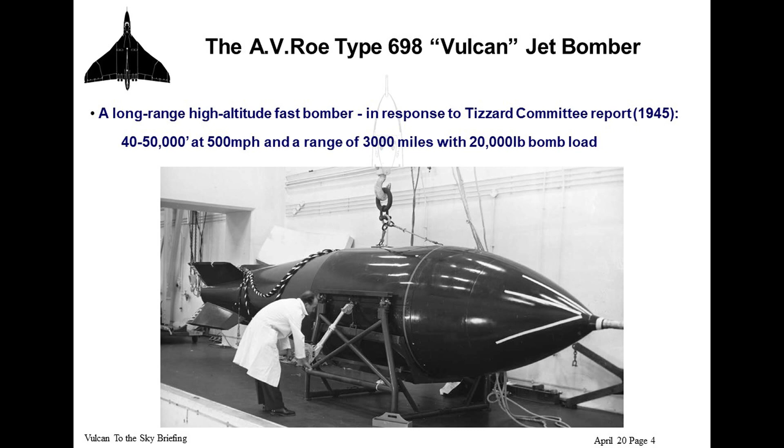Our focus is on the last potentially airworthy V-Force aircraft. This is Avro Vulcan XH558. Of all of the 300 plus Victors, Valiants and Vulcans that were made, this aircraft is the only one that is capable of being returned to flight. And I've given you there a potted history of this aircraft. It was indeed, as Tony has mentioned, the first Vulcan B2 to enter RAF service in 1960. And now at the tender age of 47 years old is being readied to return to flight.

This aircraft actually has an intrinsic value because not only was it the last aircraft to leave RAF service, but it's also the oldest complete Vulcan airframe in existence. So with that record, we're delighted to be working on this. I'm not going to bore you with very many of these charts, actually. I just need to tell you about what we've been doing. This whole exercise has lasted some 11 years now.

In 1996, a few dedicated individuals got together with the idea of discovering whether theoretically we could return a Vulcan to flight. Because we had the common view that this aircraft, of all the aircraft that have been developed in the UK, this one actually represents all that's good in engineering and in flying. It's a remarkable piece of engineering. It took us some time to convince BAE Systems that there was a mechanism, that there was a way that we could return the aircraft to flight.

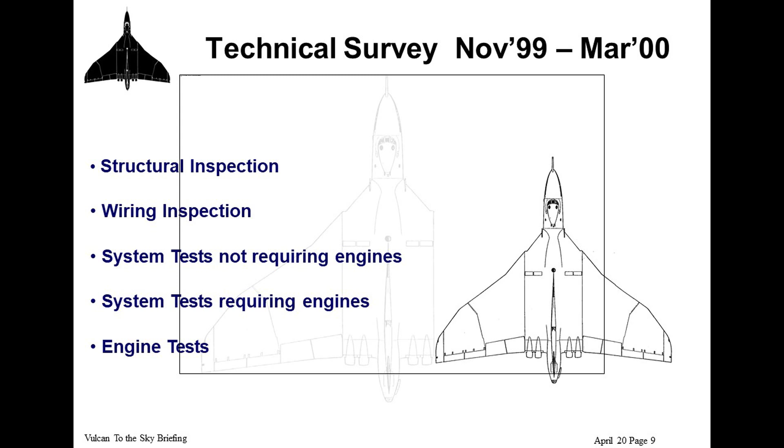I'm not going to go through any of the results of these, apart from a couple of things. I mentioned the materials - this is actually one of the front spar bottom booms. It's a mass spar boom aircraft. The engineer within BAE who supports us tells me it's actually the same as the Lancaster wing, but I don't believe him. But this thing here, this little hump, is an oxidation process called exfoliation, and it's a result of the type of material used in the wing. We did find some areas like that in the wing of this, at that stage, near on 40-year-old aircraft. One of the questions we asked was, is this a problem?

For us, the answer came from BAE to say no. They'd actually taken a look at the wing with modern tools and discovered the wing was far stronger than the original designers had thought, mainly because they were using slide rules rather than modern tools. And we could actually polish this out and protect the surface with no concerns at all.

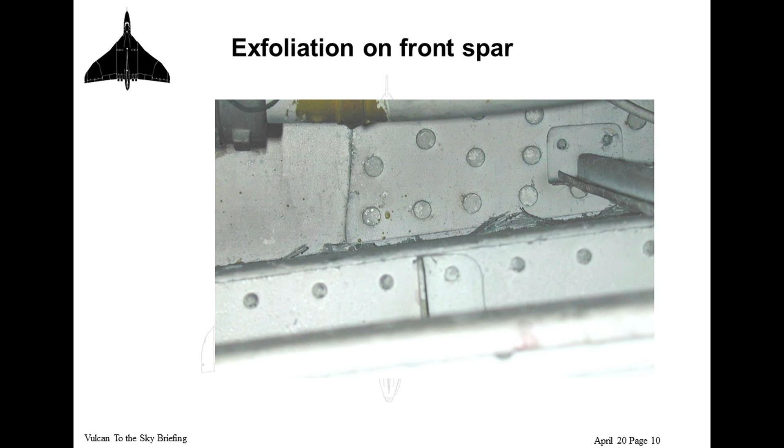Another critical success factor was the engines. Those of you involved with flying heritage aircraft know that you can repair, restore airframes really till kingdom come. The problem with heritage aircraft is the engines. I think it's the Sea Fury that uses the Centaurus engine - there's only one airworthy Centaurus engine in the world, and that's on the Sea Fury right now. When it goes unserviceable, no longer will they be able to fly the Sea Fury.

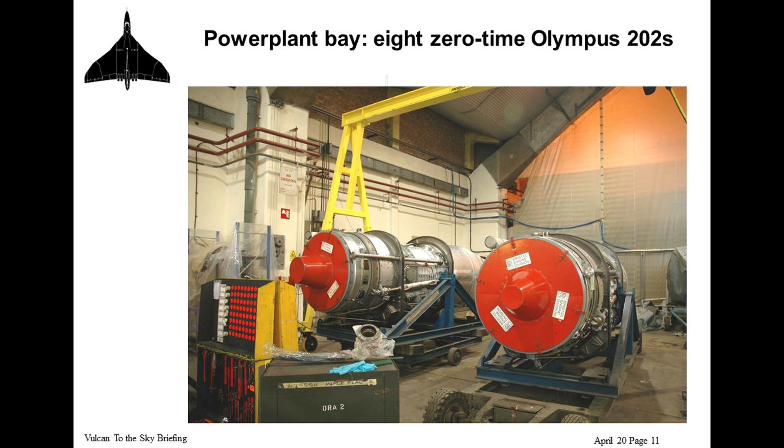We've actually got 8 zero-time Olympus 202 engines that were in bags and were purchased from the RAF, along with 800 tons of Vulcan spares at the time the aircraft was acquired. It is these engines which makes the whole project viable, and I have to say we had a Rolls-Royce engineer down at the airfield only yesterday, and he's absolutely astounded with the state of the aircraft and the engines. Rolls-Royce's view is put them in and switch them on.

Just to recap, by March of 2000, we checked out all the things we needed to check out to determine whether or not, at a reasonable cost, there weren't any major problems, we could return the aircraft to flight. And some of the things we wanted to see were indeed there. I mentioned the spare sets, which has in fact been absolutely vital for us. Vulcan documentation, we've got it all, and uniquely for an aircraft of this vintage, there's a complete design record in microfilm - 140,000 microfilm records down at Avro Woodford, or should I say BAE Systems Woodford. We've got training available, and the last thing to find was the third-party support.

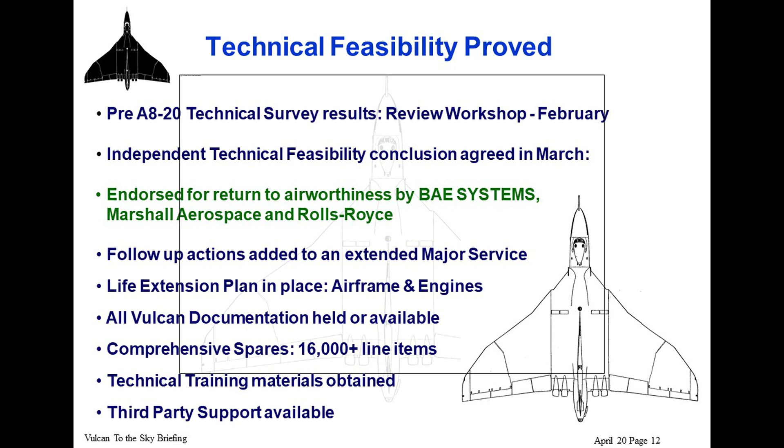Just a quick word about the start of the restoration program. This followed the normal course of a major service, which is basically an inspection, followed by rectification of the problems we found in that inspection - and we found some 2,000 or so individual problems that needed rectification. Then overhaul, which is where you take all of the system components off and overhaul them either locally or, in our case, the majority went off back to their original manufacturers. Then recovery, which is the state we're in at the moment, building the aircraft back and then into test.

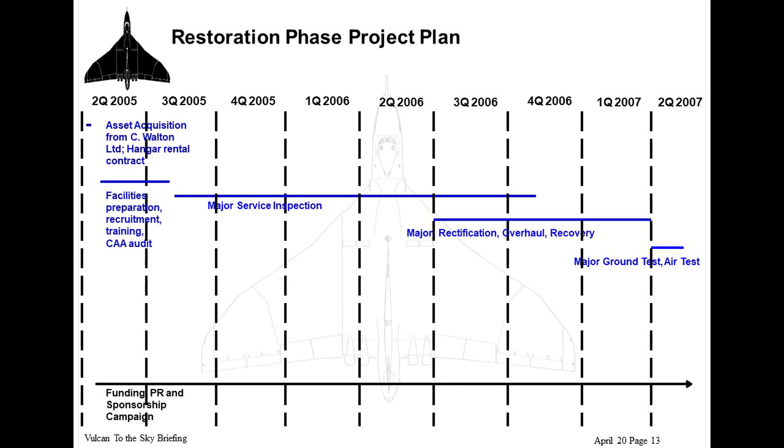We managed to hit the right time with the Lottery Fund. They were at the time investing heavily in heritage, and the heritage spotlight shines about 50 years ago. If you remember back into the last decade, there was a lot of work going on with World War II veterans, recording oral histories and the like. This decade, there's a real focus on the 1950s, which is the decade of the Vulcan.

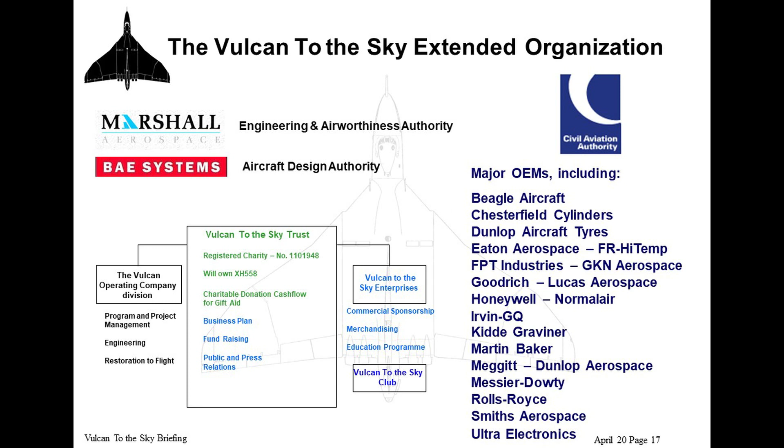But we got them on board, mainly because they were the last ones and we could really tease them about it. This is actually a very important set of companies, and the support has been brilliant. Throughout the last 15 months or so, a whole set of hundreds of components and systems have gone through the process of overhaul or even remanufacture, and the support from these companies has been amazing. In addition, there are some 100 other companies helping us with smaller parts—it is uniquely a great British aerospace effort, this whole project.

The golden rule is, in all this, you do exactly what you're told to do by the CAA. You don't try and sort of argue with them. You actually just accept what they say and do it. And as a result, it's been an absolutely brilliant relationship.

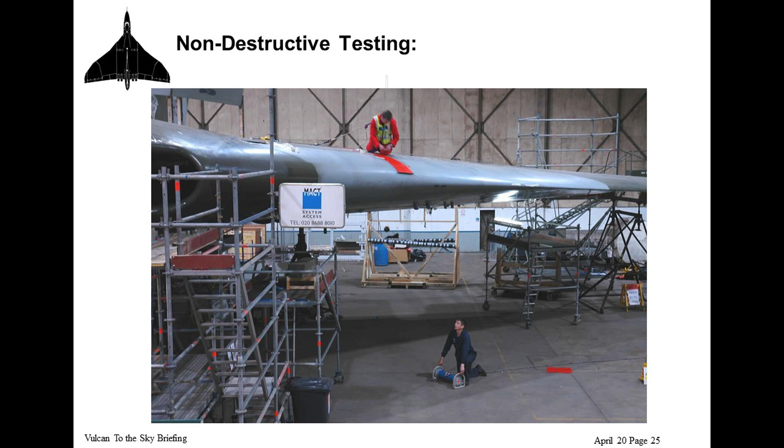We've gone through a very extensive amount of non-destructive testing, 480 different X-rays. This is an X-ray shot being prepared of the leading edge, and no faults found. In addition, we've used some very modern equipment to look at places that have never been seen before. We're actually a guinea pig for Olympus KeyMed, who are a medical endoscoping service. They make medical endoscopes, you know, the sort of thing that you get shoved up you.

And this is one that's being used to inspect parts of the wing which have never been seen. This part of the wing would have never been seen after manufacture, and it's all in superb condition. We are extremely confident about the state of the structure.

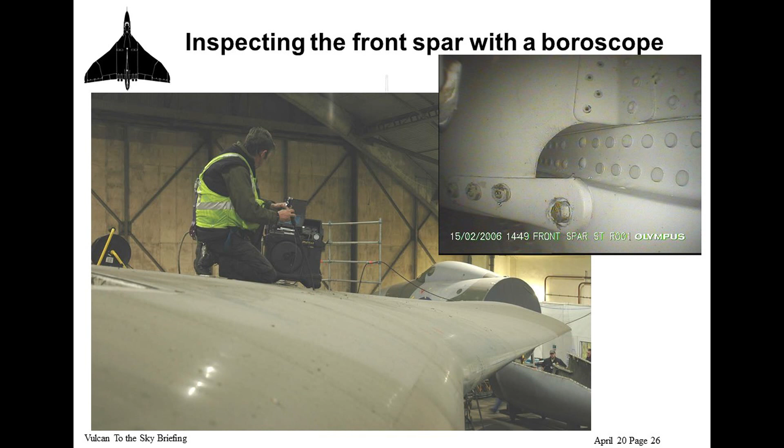I mentioned the wiring. We've extensively rewired the aircraft. All the critical systems have been rewired. As Tony mentioned, the elevons actually rely on electrical power to drive the motor that drives the hydraulic pump on each powered flying control unit. And this is replacement wiring for that.

We've got a number of system components. This is a bit of a saga, this one. This is the air conditioning unit. Note, there's no electrical power being supplied to this. It's a marvelous piece of engineering, but it's driven by engine compressor air on the aircraft.

We're using a Palouste, but it produces extremely cold air out of the end. You can see the condensation emerging. Marvelous piece of engineering, and this is a brand new one that was in our stock of 800 tons of spares.

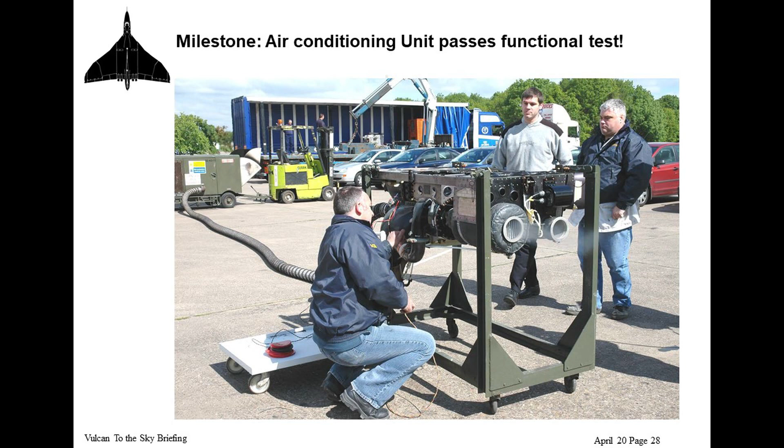We've actually made 47 different system deletions on the aircraft. Tony mentioned the military flight system. That's one of them. This remarkable piece of equipment that Tony showed earlier actually drove 2 instruments called the attitude director and the beam compass.

And those were just indicators, because behind that was a unit containing 6 different gyros that all had comparisons between them. It's a huge piece of kit. And it's very expensive to maintain. We were told that if they could do it, Smiths would charge us £25,000 each for each of the 6 gyros. Not a game we wanted to be in.

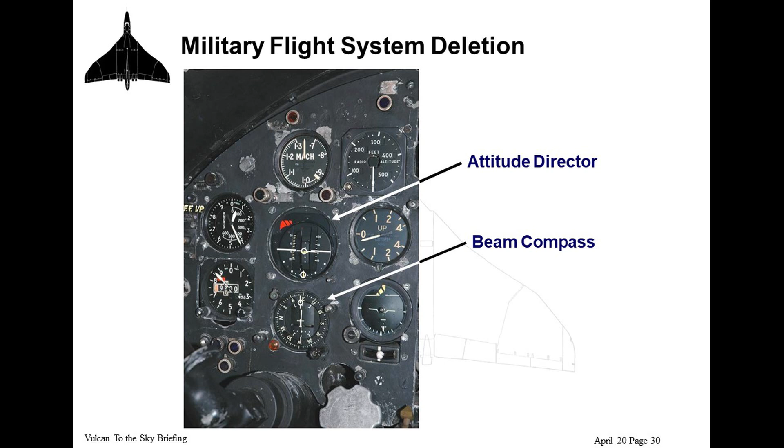So we've actually replaced it with a modern system. This is a Bendix King compass system coupled to a Garmin GPS, and just with a normal GA artificial horizon. And that's what's on the aircraft now. Net price, £37,000. So it's a no decision from that point of view.

A large number of the other operational systems have been physically deleted. So the navigation and bombing system, which is a radar-based sort of guidance system, chaff flare, the rear warning radar. You can imagine there are all sorts of systems, down to individually the ration heaters. Those have all gone.

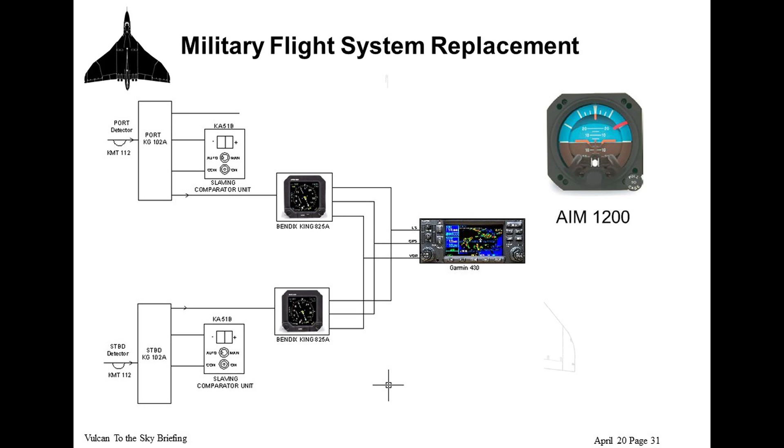Once we've finished the cockpit, if you walked into the cockpit now as a Vulcan pilot, it would look very different from what you would have remembered. Not quite glass cockpit, but getting near. We're now getting to the end of the recovery stage where that green arrow is, and beginning to think about test.

We've actually ordered our first load of fuel. 37,000 litres will arrive next week. And hopefully the week after that we'll actually start fueling up the aircraft. So we're gradually getting there. I'm not going to commit any dates. It would be absolutely the wrong thing.

I will commit that we're going to be starting testing very shortly. But as for things like first flight date, we can't do it. I mean, we just don't know what we're going to experience during the functional test. So let me forestall that question before you think of asking it.

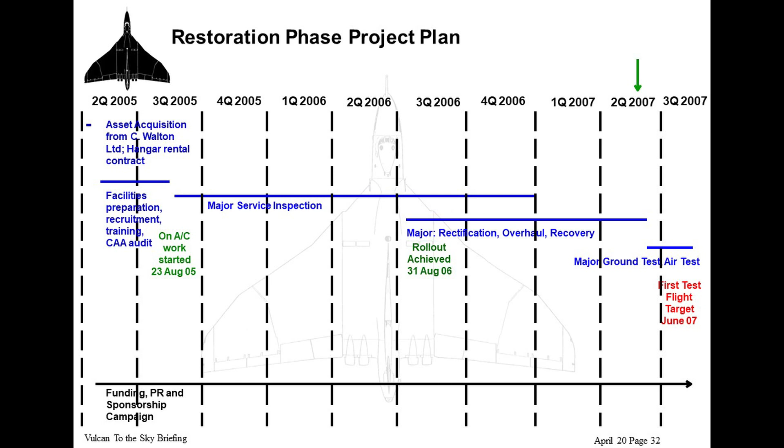We have been very lucky in some of the equipment we've got at our fingertips. A lot of the test equipment that's required for functionally testing the aircraft is available. This is one example. That blue stand there is the test stand for the Vulcan's 5th engine. That's the Airborne Auxiliary Power Plant, and the test stand below it has been used to ready the 4 spare AAPPs that we have in our set. That's actually been done under the Goodrich banner.

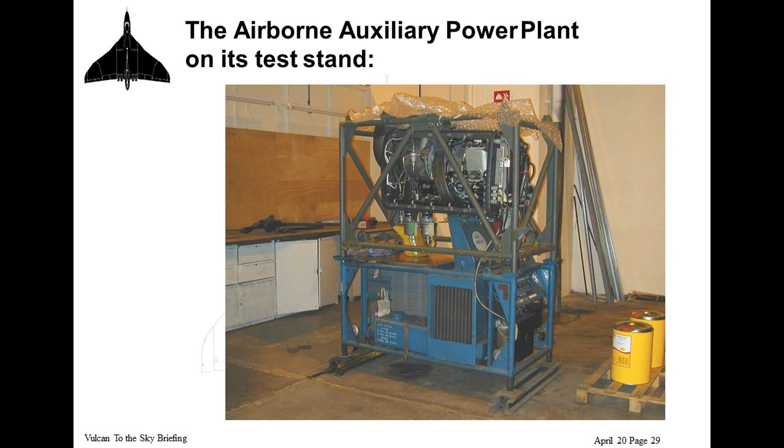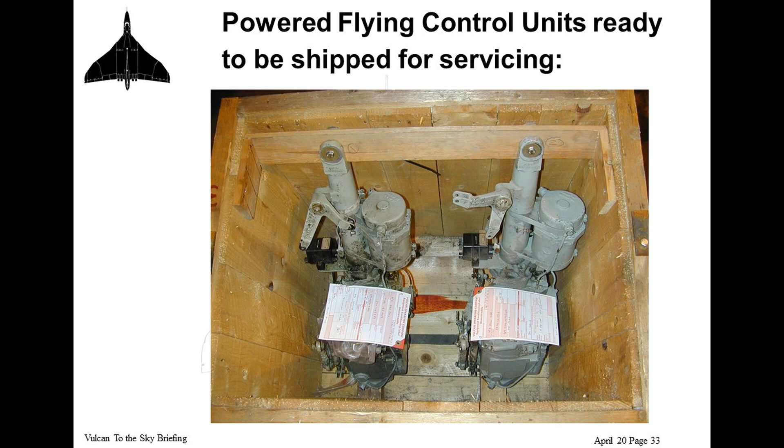Powered flying control units, those have all been overhauled. This is actually 2 of the units going off to Smith's Aerospace at Wolverhampton for servicing. We've received those back, and those are now hanging off the aeroplane. Much work on the landing gear.

Landing gear, this is where, interestingly, we're using some of the more modern design criteria. You may not know it, but the Vulcan did not have any ground-air-ground cycle limits on its undercarriage. It was all done on flying hours. And likewise for the engines.

But people nowadays want tighter criteria, so we've actually had to get involved with some really deep strip work on the landing gear. This material is an old aluminium alloy forging, and it's not exactly the sort of thing that you would use nowadays. However, all of the inspections have been done, and it's actually all perfectly airworthy.

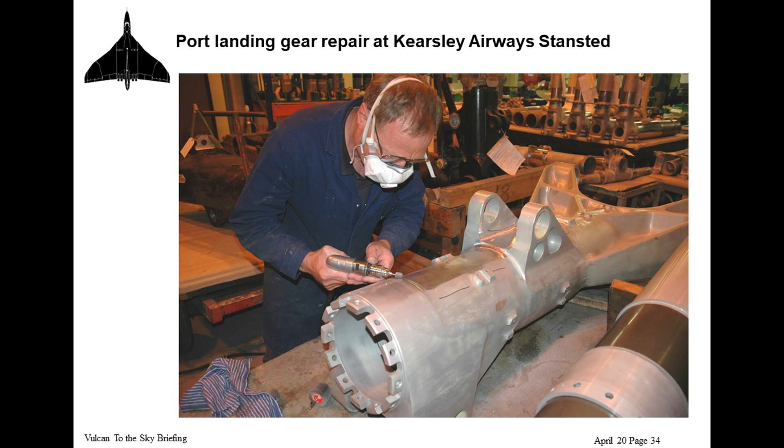We've got 14 fuel tanks on the Vulcan. Each of those has got a bag to contain the fuel. These bag tanks have been overhauled, and in fact we've remanufactured 2 down at Fireproof Tanks at Portsmouth. Just to give you the scale, that's a door there, and you can see roughly how big this is.

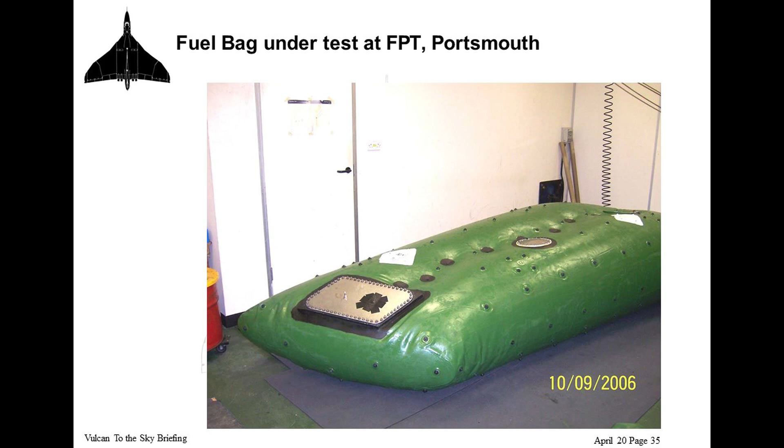Major milestone we had on the engines. There's a unit which controls the fuel flow called the chassis-mounted fuel system. It basically governs the fuel flow depending on engine speed, atmospheric conditions, and the like. It's actually a completely mechanical unit, and all of these we had to get overhauled because of CAA requirements.

They've got rubber diaphragms in them, and what you don't want is a runaway engine, because that's a very dangerous thing to happen. So these units, all 8 engines, have been overhauled by Goodrich. It was a Lucas unit. Lucas were taken over by TRW, who then sold that business on to Goodrich. But Goodrich have actually been brilliant.

Is anybody from Goodrich here?

That's a shame. Plug was missed.

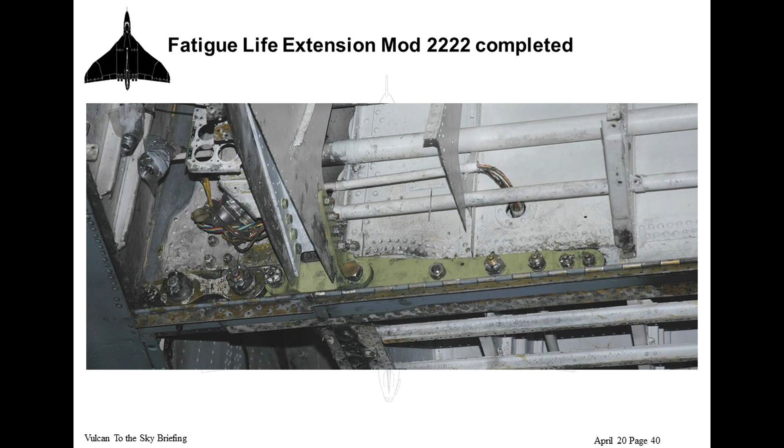So by the time Beagle had actually come to take the skins off and had a look at the internal structure, we learned that the restoration was going to be quite a lengthy process. We got a quote originally of £100,000 to do this, but unfortunately, Beagle came back in March, just literally a couple of months ago, and told me the bottom line, 283,000. So I'm just sitting here with a big liability at the moment.

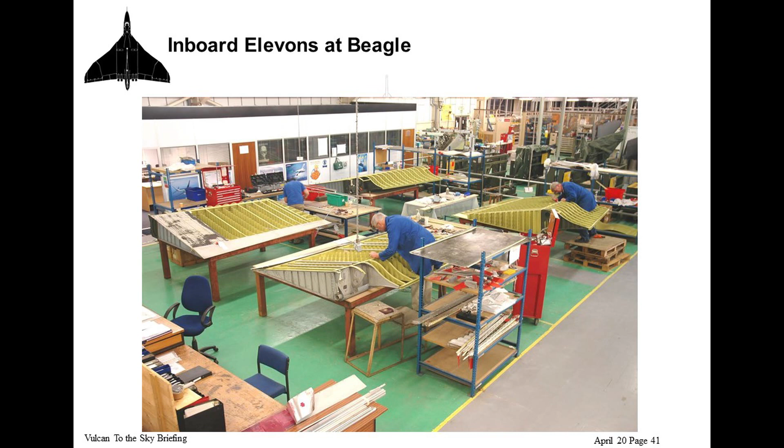But the elevons are back on the aircraft, and it does look absolutely superb. This is an aircraft now which is almost, this photograph was taken about 3 or 4 weeks ago. You'll see the elevons were fitted onto the aircraft, and we've been gradually returning the aircraft to its full configuration.

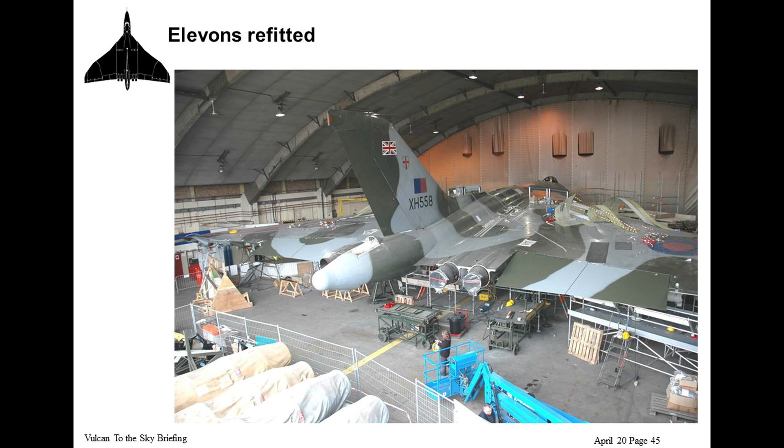We've suffered one more problem, which has actually emerged rather late in the day due to a late finding on our inspection, and that's in the roofs of the landing gear bays, where there was a lot of corrosion discovered on the ribs and stringers. We actually have to lift the planking and replace a number of the stringers. It's taken a long time to do this work.

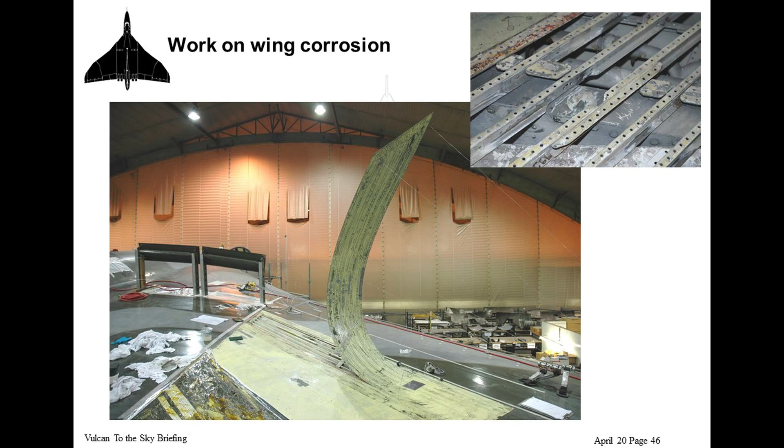We had 18 contractors working on a 24-hour shift to get this all done in time, but it's been quite an extensive exercise, expensive too. But it has, again, raised our price. We're pretty close to the final figure now, I want to say, because we are so close to the end. So all of the external work in third-party companies has now been completed, and we know the bottom line on that one. But it does mean that we're still looking for money.

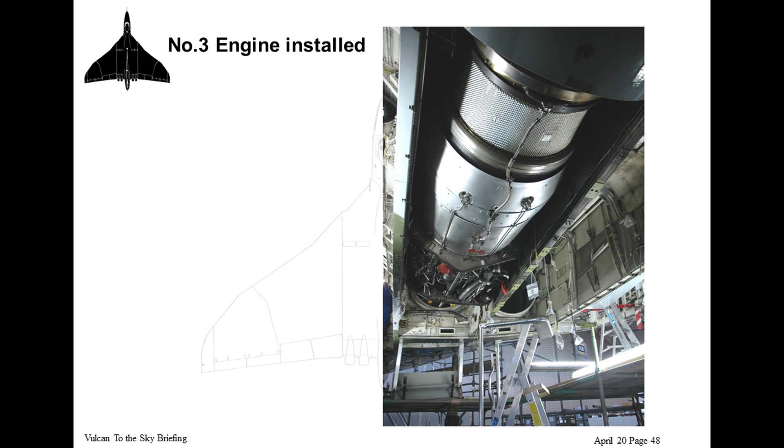Where we are right now, I will disown any report of these dates. So, are there any journalists in the audience?

We're going to be starting system test very, very soon now. Air test, because of a problem we've got with the PFCU motors, I don't think the mid-June date is achievable. But when we get to fly, it'll be under Marshall Aerospace's direction. We will be flying as part of Marshall Aerospace.

What we'll be doing then is a very short first flight just to check out the systems, the basics. Then the second flight will take us up to RAF Waddington, where we're absolutely delighted. They've said to come and do your shakedown flying at Waddington. That's important. We don't actually have a compass base at Bruntingthorpe, so we're going to go up there and do important things like swing the compass, etc.

And then we've got this air-ground workup. All of this is done under B conditions, so we won't be doing any display flying. We might appear, but it won't be a display. And after that, we do the application for a permit to fly.

What are you laughing at?

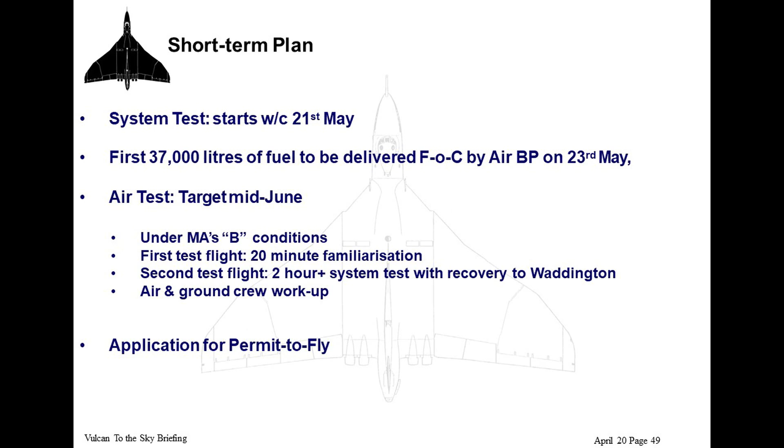Before you ask, the first test flight will be media only. We're not inviting the public to the first test flight. Our plan for flying the aircraft will be roughly 12 or so display days a year, and obviously we can do multiple events on a day during the display season, May to September. After that, during the out of season, we'd like to actually use the aircraft productively.

So on the currency flights that we have to do, we may well fly to an RAF station, leave the aircraft there for a few days alongside the educational vehicle that we're planning to have, so that we can get some exposure to the aircraft out of the air show season. Just to tell you our gross costs, before anybody asks, for the 40-hour flying season, including all of the public benefit delivery, that's the education, etc., is about 1.5 million per annum.

Lastly, inevitably, the question of environmentals comes up. We are, as you all know, an extremely noisy aircraft, and the airfield at Bruntingthorpe is an unlicensed, non-active airfield.